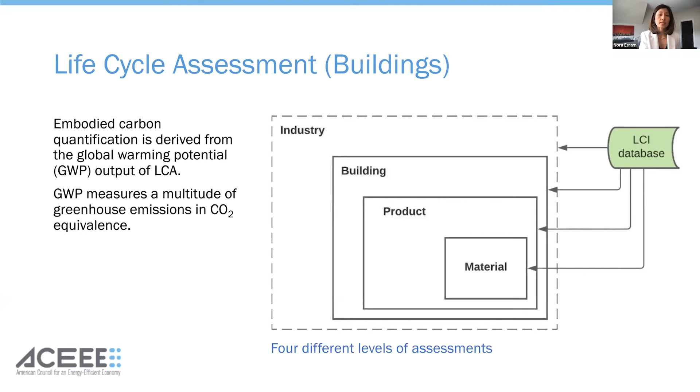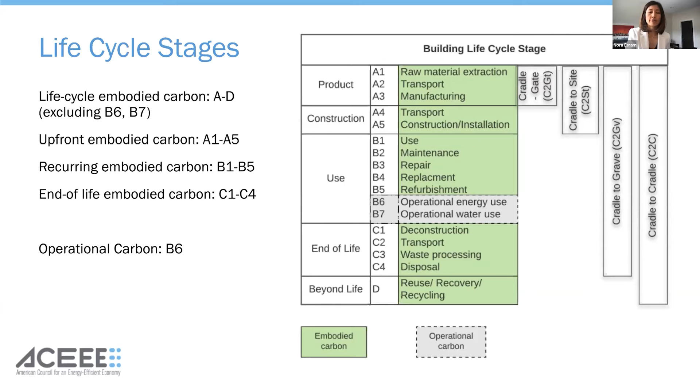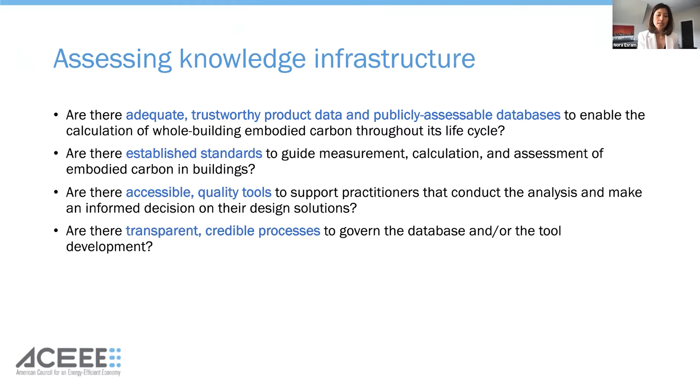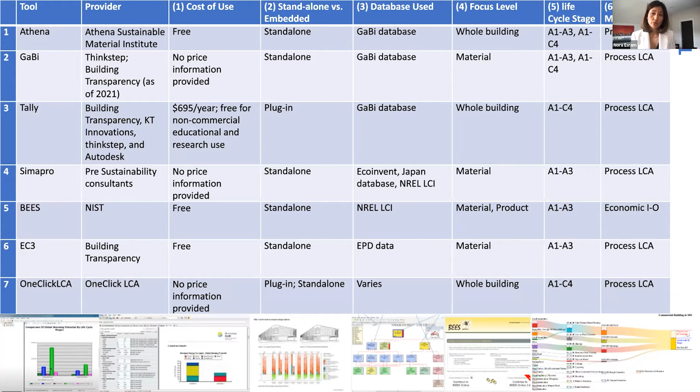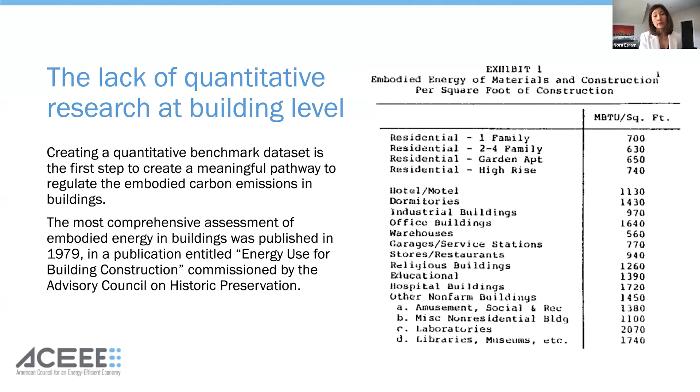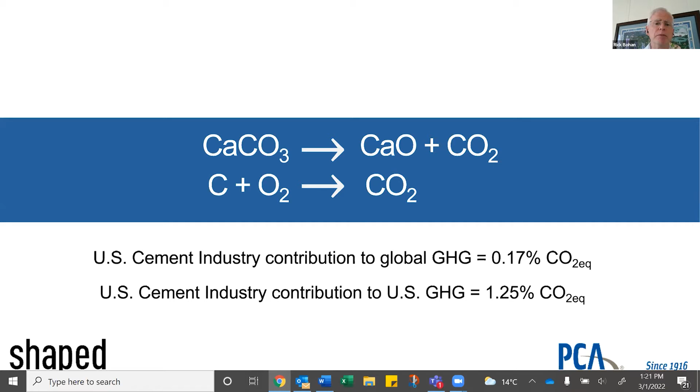So at the cement plant, we make an intermediate product called clinker. You'll never see it unless you actually visit a cement plant. But the point is, clinker is the key ingredient to cement. Cement, when it's mixed with water, aggregates, other materials, is a key ingredient in concrete. Concrete, folks, so you walk on a concrete sidewalk. Your flight lands on a concrete runway. And concrete is the universal building material in construction in the built environment. There's not a project in the world that doesn't use some amount of concrete in the built environment.

So we have a roadmap to carbon neutrality focused on this value chain. And a lot of it ties into what Nora was just saying about getting everybody. So we can't control some of the downstream parts of our value chain, but we can influence them by showing them, hey, here are things you can do to take advantage of it and help all of us reach carbon neutrality. And by the way, we've got like a 70-page document available online. You can go into a lot more detail there. Next slide, please.

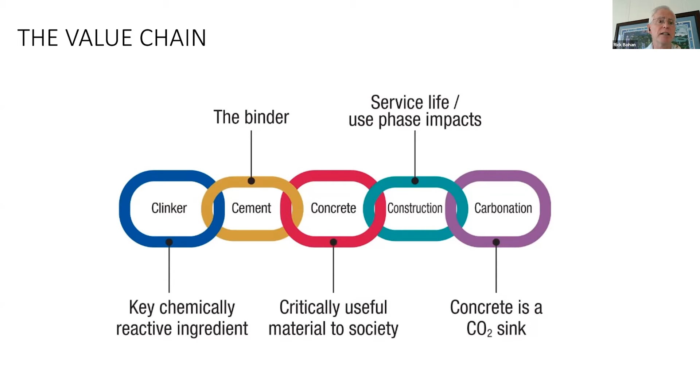I mentioned a lot of people aren't familiar with this, but there is a process called carbonation. It's a naturally occurring process. One of the best examples I can point to is, most people don't realize, but the Pentagon is almost 80 years old. Again, it's absorbing 10%. This is a very long-term process. The other thing that I want to leave folks with is that, again, hearkening back to what Nora said, when you look at the entire built environment, you really have to take a very holistic approach. Why? Because think about it.

An example, the Empire State Building is almost 100 years old, folks. Now, if you look at just the embodied carbon content of the materials, okay, but now think about all the energy that goes into the Empire State Building for elevators, escalators, boilers, chillers, fans, compressors, pumps, air handling equipment, workstations, display screens, and so forth. It's huge. So you have to take a holistic approach.

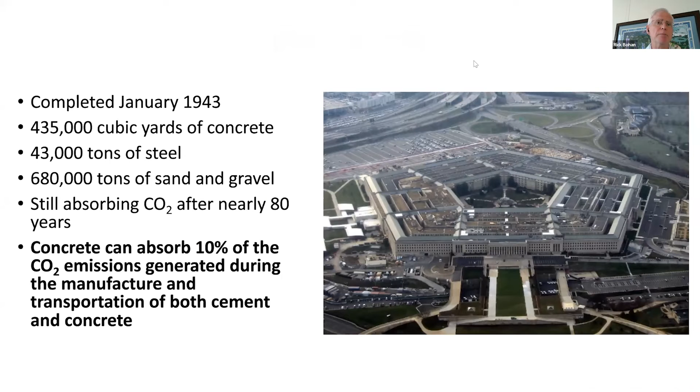And with that, I'm going to just stop right there because I know we've got other panelists and I want to make sure everybody has plenty of time and that we have time for questions. Thanks so much, Neil. Appreciate it.

Rick, thank you again. And I'd like to turn now to another important product, which is insulation. And we have Curt Rich with the North American Insulation Manufacturers Association Insulation Institute, who's going to talk a little bit about that product. Great, thank you, Neil, and thank you, Ed and Nora, the ACEEE team. The work you're doing on this topic is, I think, very important as well as timely.

Again, my name is Curt Rich. I lead the North American Insulation Manufacturers Association. That's the trade association for the fiberglass, rock, and slag wool insulation industry in the US and Canada. Insulation, our value proposition is reducing building energy consumption. So in a way, we've been, as an industry, very focused on decarbonization for the better part of a century.

More recently, insulation manufacturers have been leaders in the development of environmental product declarations. That's largely in response to demand by the design build community. And so as you look at building material products and go to any of those sites Nora had listed, you will see a proliferation of insulation EPDs on those sites.

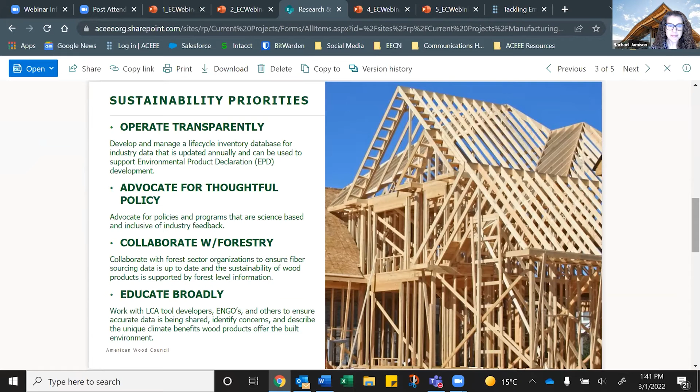So essentially you have the sequestration that occurs once a tree is planted, pulling CO2 out of the atmosphere, holding that CO2 and pulling in even more through the growth phase, and then essentially storing the CO2 in the long-lived wood product, only to then be again replanted. So it's the only building material that is a renewable resource, and where all phases of the growth and utilization phases provide carbon and climate benefits.

And my last slide is for questions. I look forward to hearing your thoughts. Thank you. Thanks, Neil. Thank you so much, Rachael.

And now we're going to switch to the other side of the whole system and hear an engineering perspective on addressing some of the questions about using these materials. And for that, we're going to have Jennifer Goupil from the American Society of Civil Engineers talk a little bit about that. Jennifer. Thanks, Neil. I'm going to go ahead and just dive right in. So as my slides are getting pulled up, yes, I am Jennifer Goupil, and I wanted to thank Ed for the invitation. I'm delighted to be here to join this discussion today.

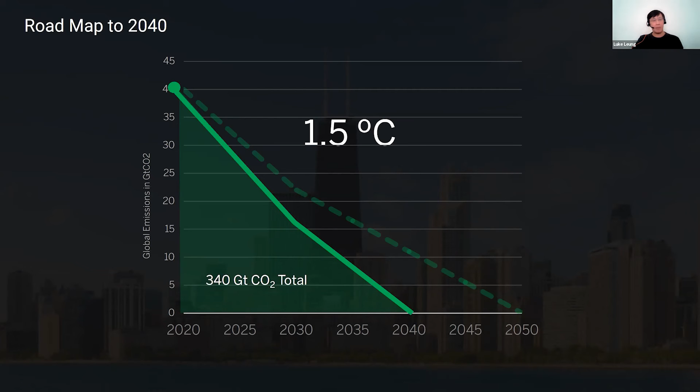So this is the roadmap right now. We're discussing in the AIA Large Firm Roundtable with the 2030 challenge. The carbon budget, given the y-axis, is not quite, but almost 40 gigatons of carbon. It's about 340 gigatons of carbon equivalent. That's all we have to deal with.

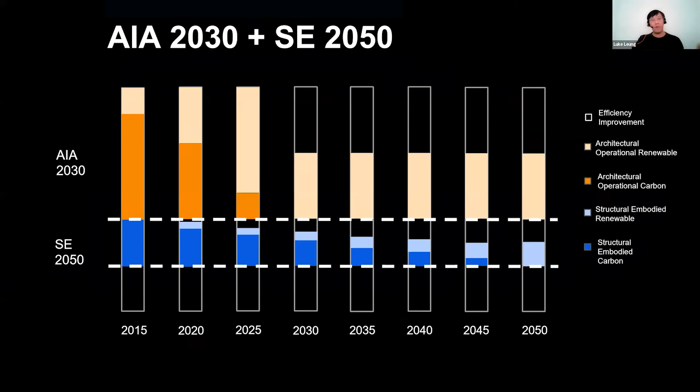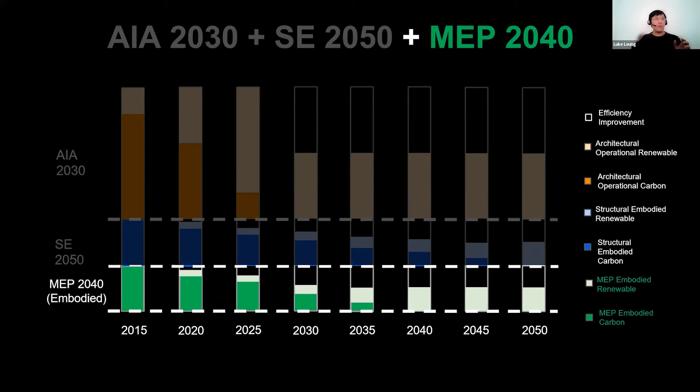So with that, Jennifer mentioned SE 2050, there's AIA 2030, ratchet operating to zero, thinking about 2040, whole life carbon zero future. SE 2050 was established a little bit before last year, so they are aiming at 2050 carbon zero. And then I also want to bring to your attention MEP 2040, also with Carbon Leadership Forum. The goal of that is 2030 operating zero, 2040 whole life carbon zero. So that's what we are thinking in terms of our industry, from our architects, structural engineers to MEP engineers.

When we think about whole life carbon, in the past, we have been focused on operational, maybe more operational energy. That's changing. So number one on operation is we're going to have to focus on both energy and carbon. The latest 90.1 Appendix G, which just came out for public review, includes conversion to carbon. So guys, let's focus on both energy and carbon moving forward.

Number two, on the operation side, it's going to be about actual performance. There are many codes like Local Law 97, and there are different cities and locations already coming up with this performance-based standard. I kind of like what Boston is doing. Like what you're seeing on the screen, they establish a roadmap of carbon emission from now till 2050, and it's going to be a little punitive. So you're going to have to perform to that performance and actually ratchet carbon down to 2050.

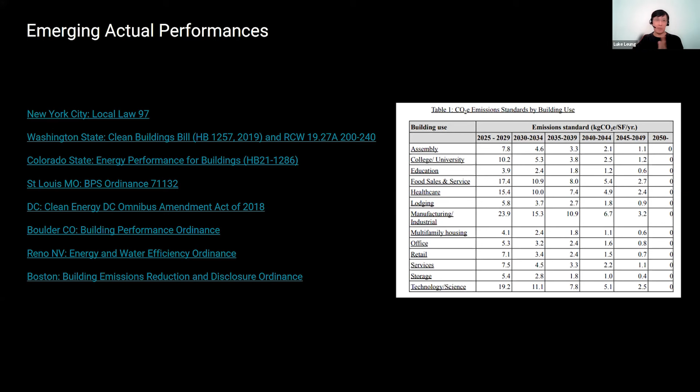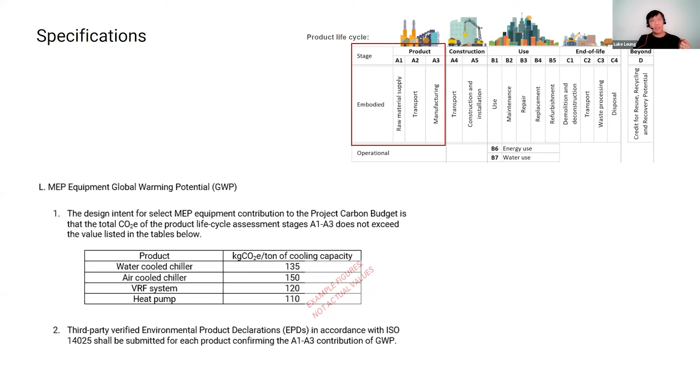Now we can discuss whether it should be 2050 or 2040 per the latest IPCC and United Nations finding. So that's the operational side. What about the embodied side? Right now there's a spec section we can use to address A1 to A3. Basically, it is from cradle to gate of manufacturing, the embodied carbon. We are developing spec sections to do that.

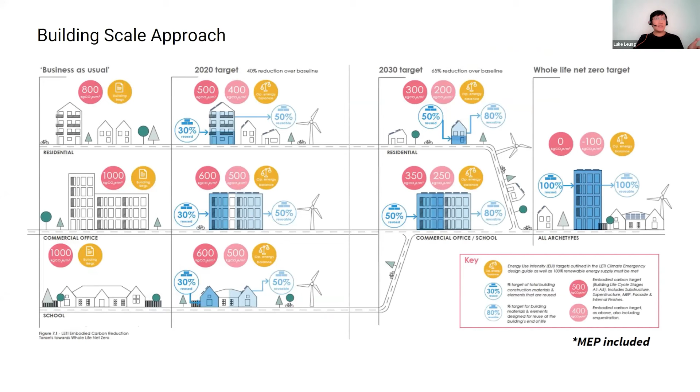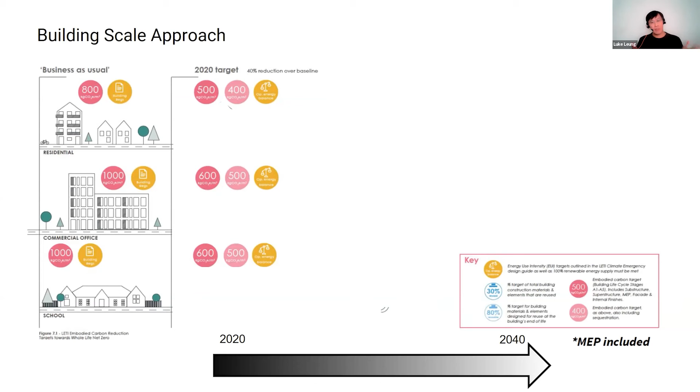So what we need is data on the whole building carbon. This is like the LETI information of City of London. They are trying to get to 2040 net zero. But what is interesting in City of London is they have the whole building scale embodied carbon information. No matter if it's commercial building, residential, school, they establish about 500 to 600 kilogram CO2 equivalent emission per square meter as a baseline for today. And they're looking for 100 kilograms CO2 equivalent of reduction. So from 500 to 600, a reduction to 400 to 500.

Not only that, they start developing data to figure out the embodied carbon reduction. How do you get 30% recycled? And how do you get 50% end of life recycling? So reduce their embodied carbon. Because in the future, by 2030, they want to up those numbers. So your building level target is 300. And then you have 50% of the product coming from recycled material, and end of life is 80% recycled. So you can see, similar to operational carbon, they ratchet down those data.

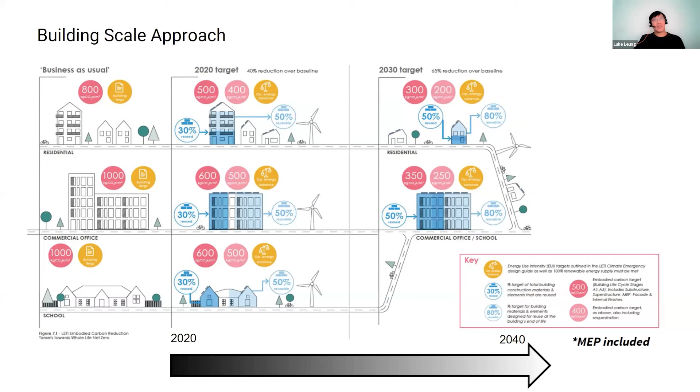In the US, we also need these targets, not just on material scale, but also building scale, just like the CBECS of embodied carbon. We can establish this baseline to ratchet down the embodied carbon to a 2040 net zero future. Finally, those two things I talked about, operational carbon and embodied carbon, cannot be looked at as silos, because if we do, then it will be just local optimization. It's not a global optimization. For example, I could have very high embodied carbon but very low operational carbon in a really passive building. Again, I can have really high operational carbon if I have a really low embodied carbon building.

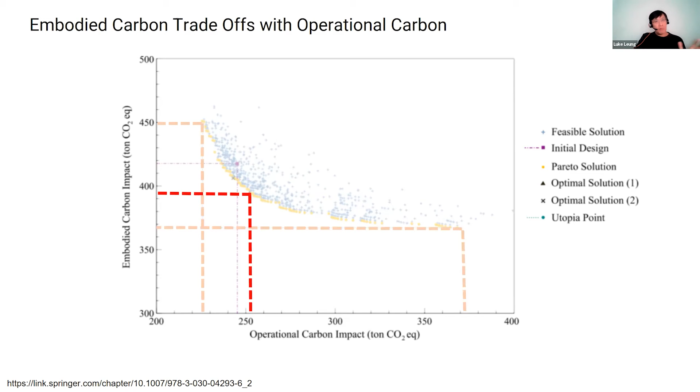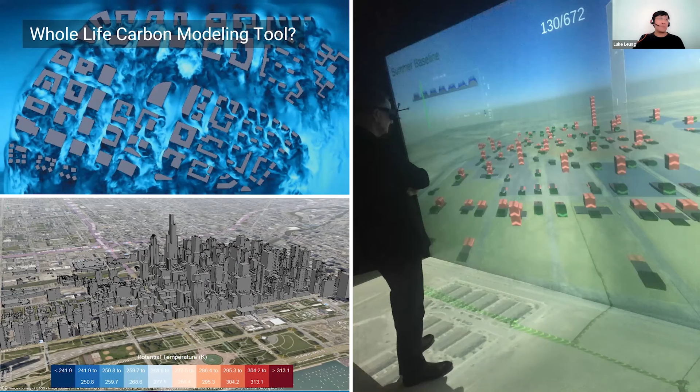The optimum could be somewhere in between. So rather than look at embodied and operational carbon as silos, what if we develop a tool where you input the building parameters one time, like an energy modeling, but it gives you whole life carbon information to balance the embodied and the operational to give you this optimum goal. Because at the end of the day, a carbon molecule is a carbon molecule. It doesn't matter whether it's from embodied carbon or operational carbon. With that, that's my summary of embodied carbon, operational carbon, what we need, and the tool to get to that final optimum. Thank you.